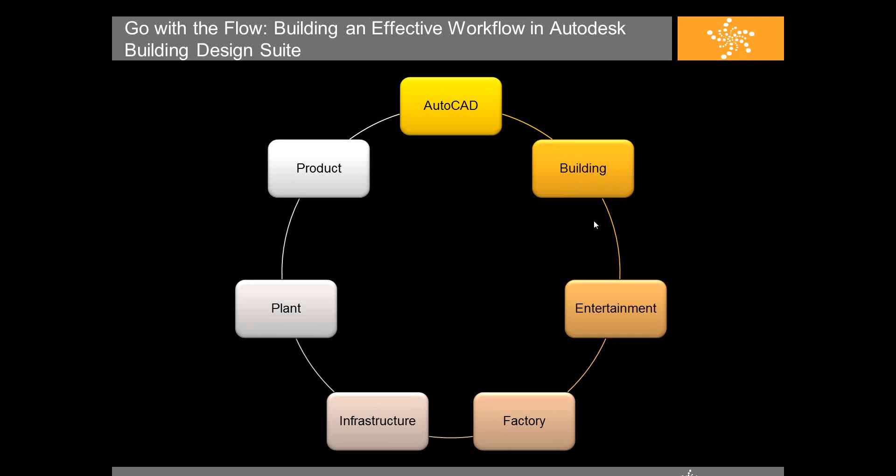The version of this that we're going to be focusing on is the Building Design Suite. There are certain programs that are consistent throughout all of them, but we're focusing on that one. Now, within that Building Design Suite, these are all the different programs that you can get access to. And now when I say programs, I'm being very specific about that, because program essentially means installed on your computer.

Now, the reason why I'm being specific like this is that you also have a lot of other tools that are available to you on Autodesk 360. And all of these impact your workflow. They give you different methods of integrating one program into another, how each one can leverage existing content. And one of the things that they're trying to do each year is make sure that your work is consistent. If you're familiar with the examples of BIM, it's very much like that. You want to make sure that your work is consistent, you're not having to redo it over and over again. And when you're moving from program to program, that you're not losing information or losing features or abilities, which cause you to do rework, which makes you less efficient.

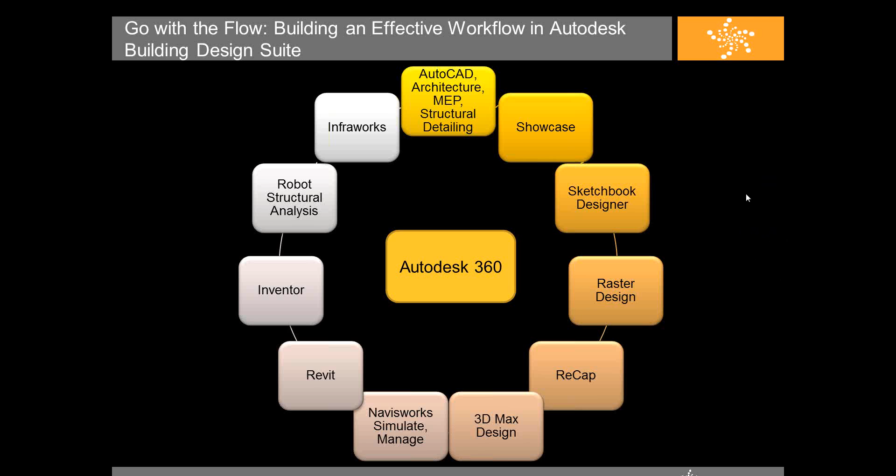So throughout the presentation, what I'm going to be doing is focusing on a couple of different things in terms of how these different programs work with each other and how they've updated that in 2014. Now, it doesn't mean I'm going to be touching on every single one of these, only specific ones. Again, if you do have any questions, please feel free to drop them into either the questions or the chat window, and I'll be doing my best to keep an eye on that.

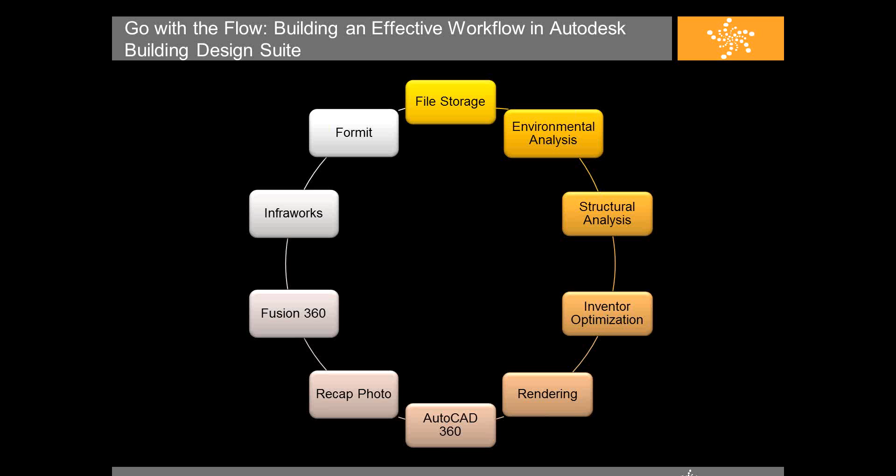All right, so let's see here. With the 360 tools, these are the ones that we actually have for there. So you have file storage, environmental analysis, structural analysis, Inventor optimization, rendering. A couple of ones you might not be familiar with are Formit, InfraWorks, Fusion 360, and Recap Photo. So those ones I definitely will be touching on as we go through this stuff.

Now looking at Revit, for example, and this is not Revit Arc or Structure, just Revit in general, they've enhanced the import and export for IFC, DWG, DXF. But the one I wanted to focus on is the import and exploding of 3D solids into 3D elements. Now like most people, explode is a dirty word when you talk about Revit. You don't want to start exploding CAD files, and if you do, you want to almost do it in a separate file other than the one in your project.

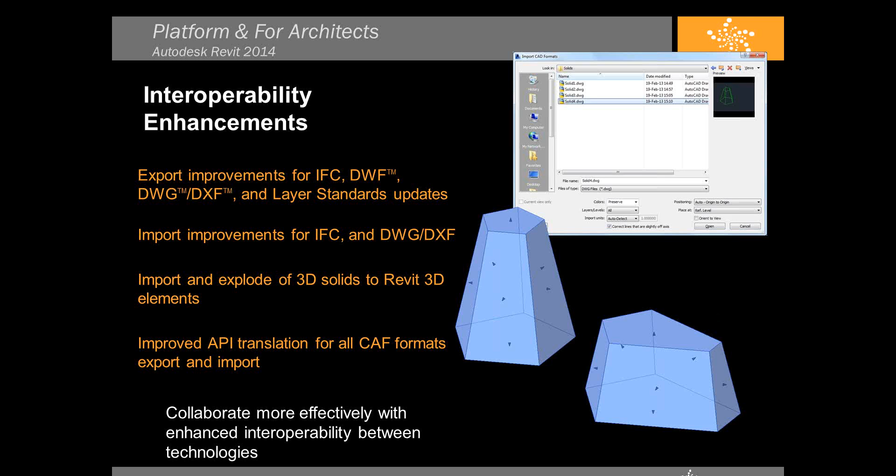But if you have mass or solid forms that have been created in another program, whether AutoCAD or SketchUp, you don't want to have to redo it just because now you're moving to Revit and want to continue that process. So this allows you to take that 3D solid created elsewhere and explode it so it becomes a local 3D solid. That allows you to grab, push, and pull, and manipulate that element as if it was done natively inside Revit. Not to say this works with every single solid object, but if it's a clean solid element, it should work.

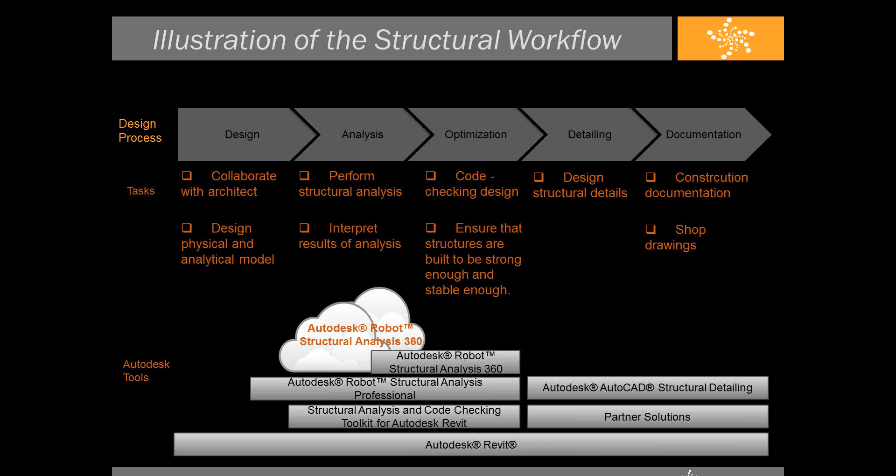Now in terms of structural workflows specifically, one of the things they've done is made sure the different tools relative to Revit Structure actually work more efficiently. The tools are already there — you already had Robot Structural Analysis, you already had AutoCAD Structural Detailing. What you did not have previously was the structural analysis and code checking toolkit. Also, Robot Structural Analysis in the cloud was sort of in beta last year — they were still testing it out and seeing how people took to it and utilized it for their purposes. So these are some of the tools that are in there.

Essentially, when you're using Revit Structure, or the full version of Revit, and you download it from the Exchange App Store, you can now actually do certain code checks based on your Revit model to ensure compliance. Again, trying to keep things consistent — the model you're doing for your analysis is the same one for your detailing, the same one for documentation and coordination. You can now run certain checks on that in the exact same program, you don't even need to send this out. If you wanted to do analysis and your current computer doesn't have the hardware to handle that, you can actually upload it now to the cloud for analysis.

But the main one here in terms of workflow that is completely new is that code checking framework. Just note that little asterisk — that reminds you it doesn't come with the program by default. It's a subscription tool that you can get. You just have to download and install it.

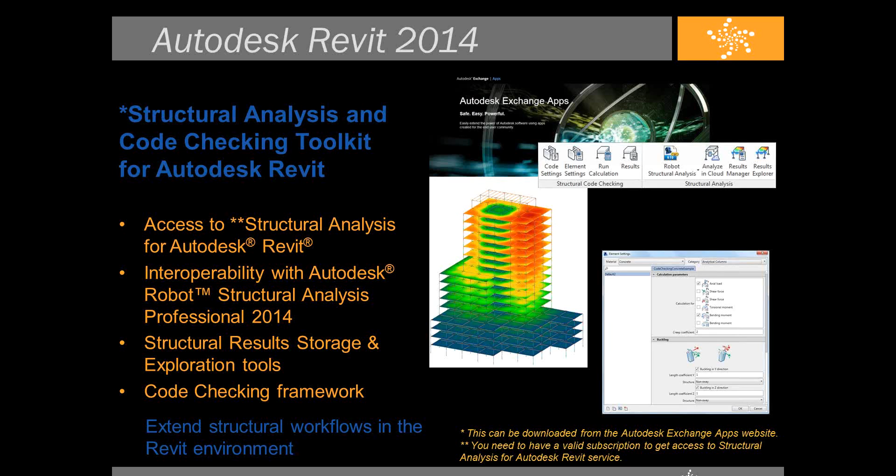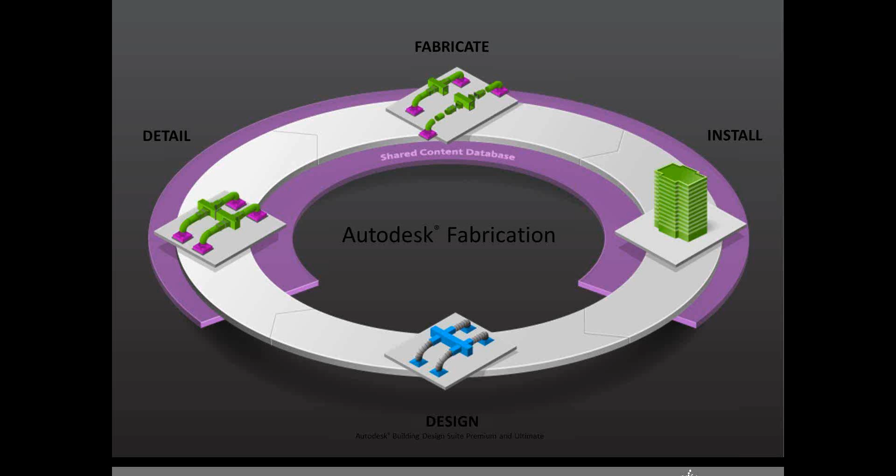Now with regards to MEP, one of the complaints or knocks against Revit MEP is that it doesn't quite do fabrication. It does detailing, it does documentation, it does design very well, but it's the fabrication where it starts to fall off a little bit. Well, Autodesk actually purchased a couple of companies about a year ago that solely focused on that aspect, and they've been working on integrating that into Revit since.

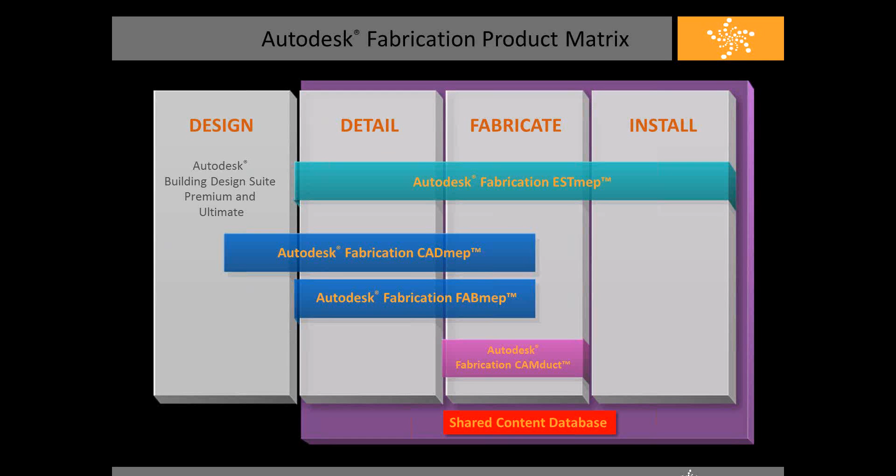So this allows you to take your Revit model and sync and go back and forth with CADmep, FABmep, CAMduct — they will share a content database. That way your information is actually going to be consistent; it's not like once you export it, everything has to be rebuilt from the ground up. This allows you to synchronize your work and keep your workflow consistent, even if you're not the one who designed it. So you might be given Revit MEP content, but you're actually the one who's going to be doing the fabrication. This allows you to take the model geometry you've been given and turn that into the fabrication models you need for your shop drawings or more highly accurate clash detections for construction coordination.

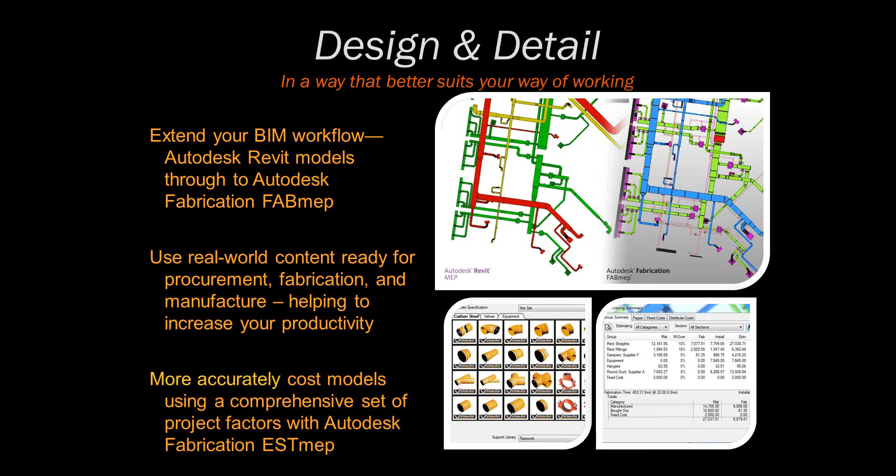So in this case, you just take the model that you've already designed, and then you can convert that. The nice thing is, because it's using a coordination software, it actually allows you to keep working in either one or the other.

Now, quantification. Last year, actually the last several years, Autodesk has been working with a tool called QTO, or Quantity Takeoff. This tool was actually based off of Design Review, and it was one of the tools that you can either get on its own or as part of the Design Suite Ultimate. Now, if anybody actually has Design Suite, you might have noticed that there is no QTO in the Design Suite in 2014.

That's not to say that they're not doing any quantifications anymore. What it means is that that ability has actually been rolled into the Navisworks application. So if you have Navisworks, what you can actually do is take the consolidated models that you might be getting from multiple people, multiple programs, multiple resources, and actually create your quantification in that program. You'll still have the ability to do a report, you still have the ability to do formulas, and you can also export out to Excel if you prefer to finish things up in there once you've gotten your counts.

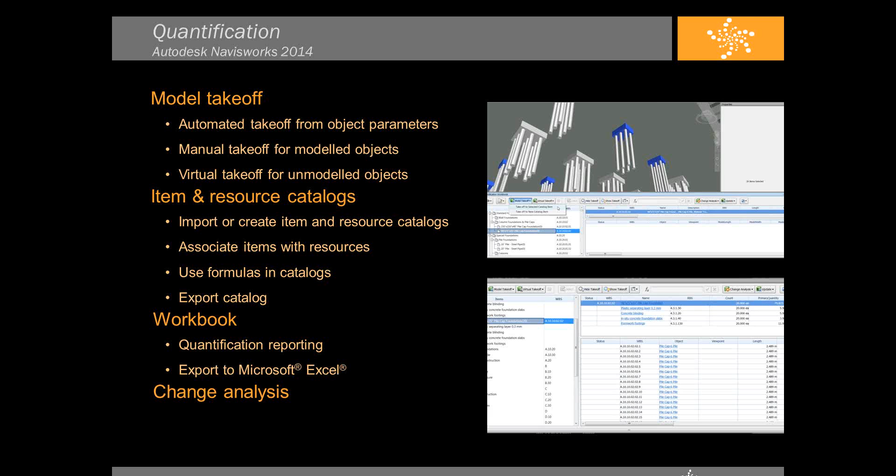So while Navisworks has a bunch of new features that are great for the workflow within the program, this is the main one that actually works outside of it or is completely new.

Now, for those of you who use Inventor or who work with manufacturing or just want to create content based on manufacturer's objects, again, this is sort of an upgrade of what was already there. You previously had the ability to create Revit content off of an Inventor family. So let's say you had mechanical equipment, and you actually are the manufacturer of said equipment. You can take that and use tools like shrink wrap and turn that into Revit content. The problem was it wasn't really intelligent. It was sort of like, this is it, and that's the only size, and there's no manipulation.

So what's happening now is that you're able to export from Inventor into Revit and have it understand elements. What I mean by understand is, if you think back to the slide I had earlier about bringing in CAD examples and exploding that, it turned into native Revit geometry that you push and pull. This is exactly what I mean.

So rather than bringing in something that is very complex and has a lot of sloping or rounded edges, I can simplify that surface inside of Inventor and then tell it that I want you to send this out and make a Revit content that's made of native elements. So if it's created based on extrusions or blends or revolves, I can easily send it from one into the other, and now I actually have my Revit content without me having to essentially rebuild it all over again.

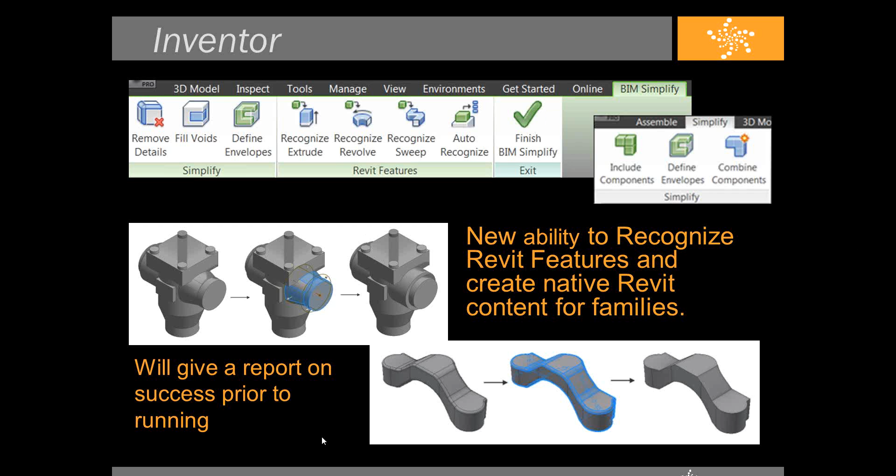Okay, now another program here is InfraWorks.

Now, if you haven't heard of InfraWorks, or you saw it and sort of disregarded it because it's a civil tool, it actually is a lot more than that. What it allows you to do is present or communicate your designs in more efficient ways.

Now, again, it's called InfraWorks. It's designed for infrastructure, but there's nothing in that tool that says you can't use it for a campus or a site or even within a building. So it's just a method of coordinating with different programs. Now, how this actually works now is that it works with a lot more programs natively.

So it can actually read a Revit file on its own, and it could read Max files on their own. You don't have to be exporting out to specific file formats. It actually goes back and forward now with Civil 3D, where previously it only went in one direction. So now you can build either large-scale infrastructure models, or you can still use it for very small-scale models as well. Just depends on what you're trying to do.

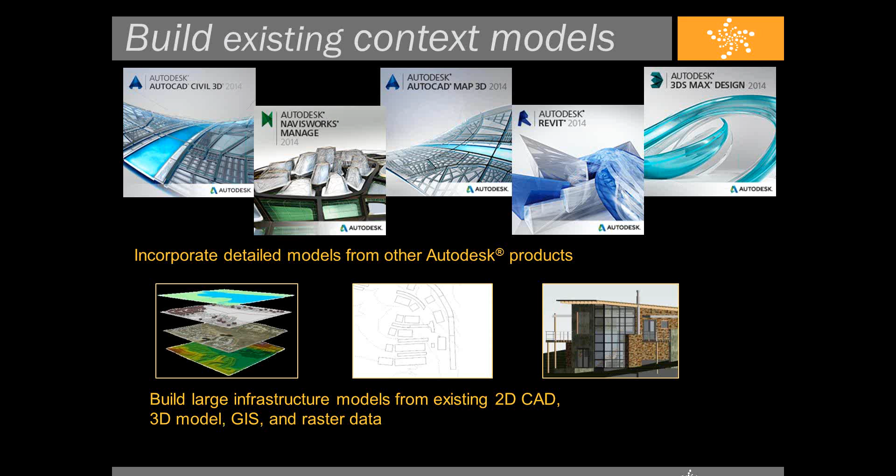But if you get past the name that is more focused on infrastructure, you can utilize this for just about any kind of presentation where you have multiple files coming together. You want something that's very smooth, and as I'll show a little later on, you want something that can be uploaded to the cloud and actually viewed on an iPad or on a website.

And this is just a listing of some of the different file formats that it can read natively now.

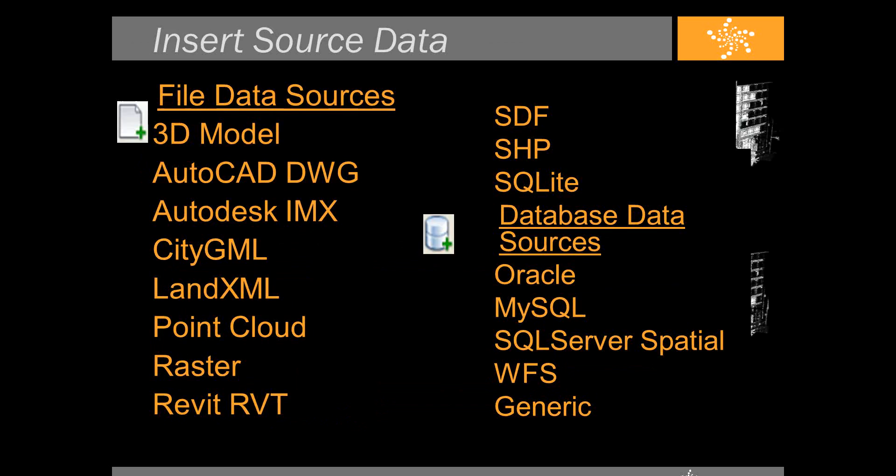In terms of Revit and point clouds, one of the things they've done is put in a new point cloud engine, which I'll talk about specifically in a minute. They've allowed you to snap to points and detected planes a lot more easily, with more visualization options and control for cleaning things up. You can see on the right side more content, more colors, more understandable information. It's also going to be a lot faster than it had been previously.

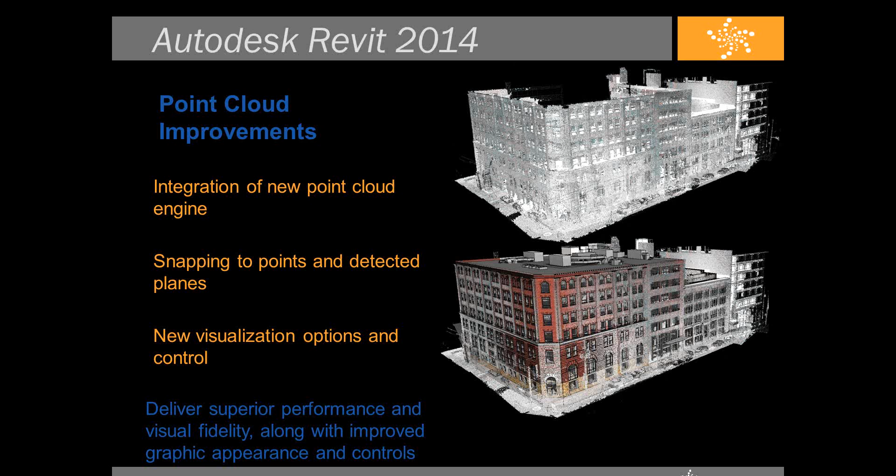Now, taking a look at some of the 360 cloud tools, we have rendering, energy analysis. The civil design one there is partially because of InfraWorks. Structural analysis I mentioned earlier, design optimization if you're working with Inventor, and typical collaboration tools.

Now, in terms of new tools specific for the workflows, one of them is storage. 360 was already a storage medium, you can upload and download content there. What they did with the 2014 version is make it more like a Dropbox or a Google Drive, where you actually have a mapped hard drive on your computer that will sync with the content in the cloud. So if I have files up there and want to upload or download, I can just look at that folder.

I can go straight in there, create file storage, folder structure, organization, tell it which I want to download and not, and manage all of that from my computer, as opposed to constantly having to go to their website where you may or may not like the interface. This gets installed automatically when you install the suite.

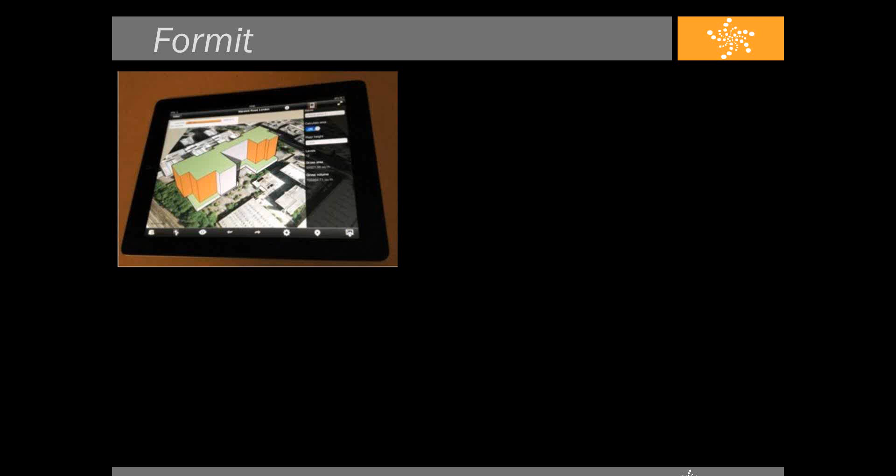Now, another one here is called Formit. This isn't necessarily part of the suite, it's a free iPad app. The reason I'm mentioning this is how it actually integrates with the software in the suite, in this case Revit. What this allows you to do is model using a very simple and intuitive, almost like finger-painting kind of motif.

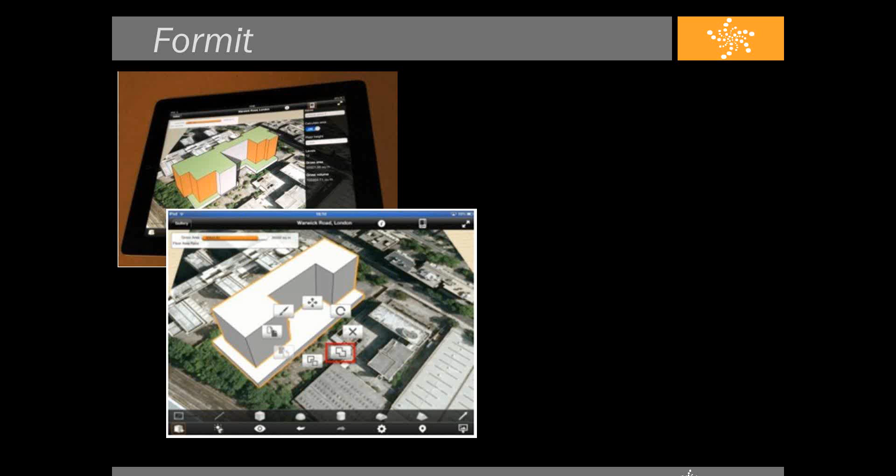But you can actually bring in maps from Google Maps, locate where your site is, and start using push-pull kind of controls to design what it is that you want. Once you've designed that, while you're in the iPad app, you can get figures and information like gross square footage. Similar to Revit where you do mass floors, same thing.

Once that's done, you can actually see on Autodesk 360 what files, models, and designs you started with. From there, you can tell it that what you'd like to do is download that file. Now, I just finished talking about how Autodesk 360 can synchronize to your desktop, and now I'm telling you that you can actually go up here and download. The reason why you need to go to the website and download it is because what's actually happening is it's not just downloading a Formit file.

You have the ability to tell it that I would prefer that file to come in as an RVT or as an STL. So if you have something like a 3D printer, I can actually download my little Formit model into a format that I can just put right to my printer. Same thing for Revit—I can open that file up in Revit or Vasari and continue manipulating and designing there.

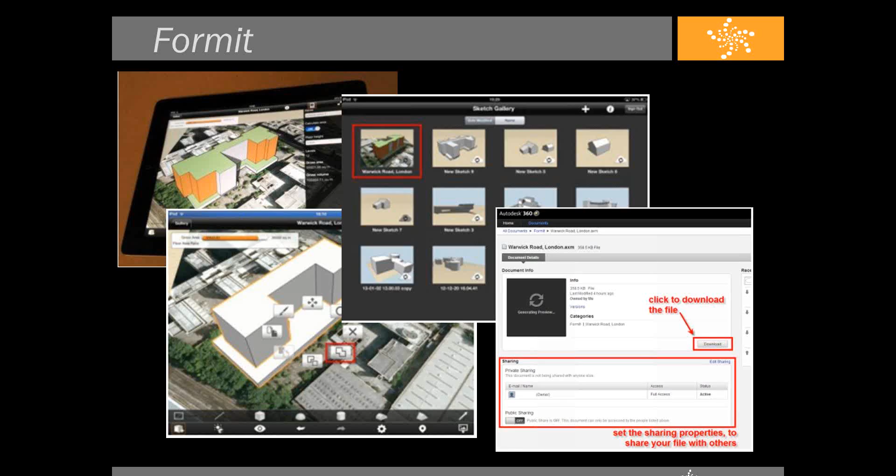I've been talking a little bit about point clouds, and one of these is a tool called Recap, or Recap Photo. Recap is a point cloud management and viewing tool that gets installed with the Building Design Suite. This is also some of the integration and tools that allow the other programs in the suite to work with point clouds much more efficiently.

Point clouds are point clouds for the most part, and it can understand many different formats. The real interesting thing is Recap Photo, because that actually allows you to upload photographs of a building, site, or model, and it can create a 3D model of that. If anybody has seen tutorials about Autodesk 123D Catch, this is essentially the professional version of that.

Where Catch is geared more towards the hobbyist market, this will be coming with your subscription. At the moment it's still in a public beta, but this allows you to create 3D model geometry based off the point clouds that it creates from your photographs. So from there, you can take something like that and actually make a 3D model of it.

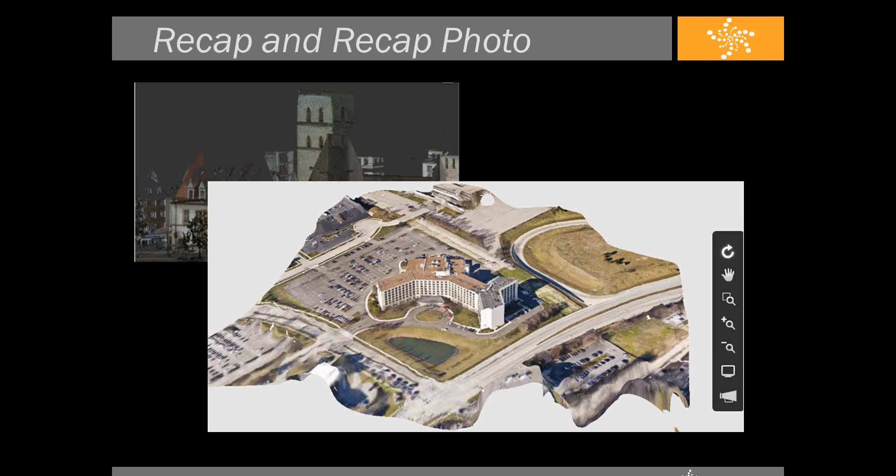Now, Fusion 360. Again, some of you may or may not have heard about this, and this is another one that's in beta right now. But the promise of this tool is that, number one, it's cloud-based, so it takes advantage of the computational power of the cloud. How this will help your workflows is that the software itself is agnostic.

It doesn't care where the files come from. In some ways it's like Navisworks. The goal of this product is to be able to upload whatever file format you need, whether it's an Inventor file, a Revit file, or a Rhino file, but still maintain the geometry and intelligence assigned to that. If you have an Inventor file with different parts coming together and hinges, a Revit family with parameterization and flexible points, and a Rhino file with similar features, all of that should be maintained.

While you're working on it in the cloud, you'll have the ability to save it or export it out as a file format of your choosing. That is the goal and the promise of Fusion 360. Again, at the moment it's in beta, but this is one of the cloud tools that will be part of our workflow going forward.

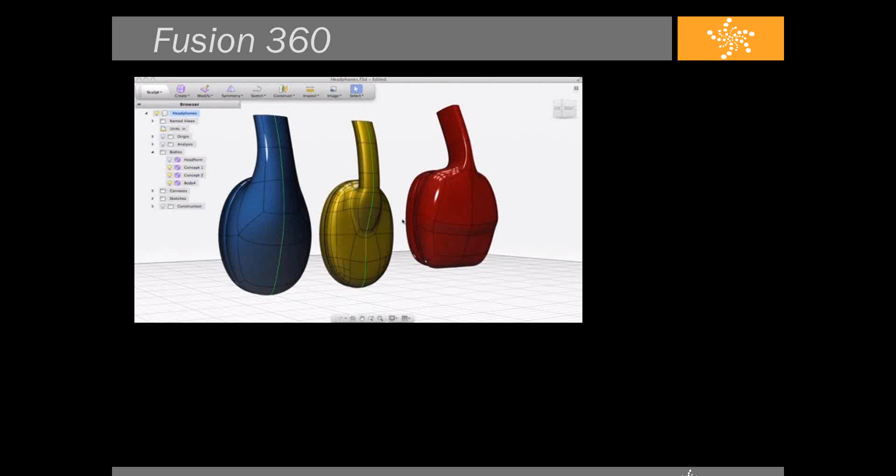So I went through a bunch of different software that's currently out there. Some of the new programs are still in beta, but they are a public beta, so you can sign up if you want to try them and help guide their delivery.

Of the questions we have, one is about the solids workflow between AutoCAD and Revit: does Revit recognize AEC walls as a wall, or is that still imported as a solid? That would still come in as a solid if it was a DWG. However, if you utilized it as an IFC file, that would be understood as an actual wall.